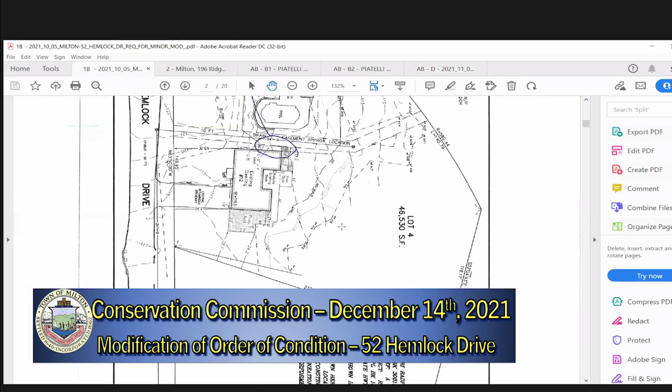First on the agenda is number one, modification of order of conditions at 52 Hemlock Drive. Is there a presenter for that? Yes, Steve, do you know anything about this? I have not heard it from anyone, but I do have some information, which I've put on the screen. If you could, just kind of walk us through it - we've got it in our packet, but you may want to address what the issue is.

This is a matter that we did issue an order of conditions - the date is November 2020. That is one where they wanted to build an addition on the opposite side of the house, so if you're facing the house from the street, it would be on the right-hand back. The one that we approved before was on the right as you're looking in from Hemlock Drive. Exactly, right here.

That's the one where we had asked for a revision because their original plan had a cantilever deck going out over the 25-foot non-disturbance zone. At our request, they pulled that back, gave a redesign, and we approved it back in 2020. So this is a proposed request for a revision. Can you describe that, Steve?

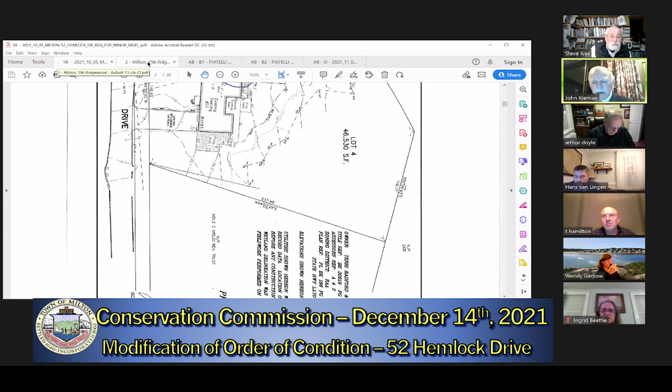In the meantime, we can defer that and go to number 2 on the agenda, which is a request for certificate of compliance from 196 Ridgewood Road. Do we have an applicant for that request? It sounds like we're in the same boat as the first request.

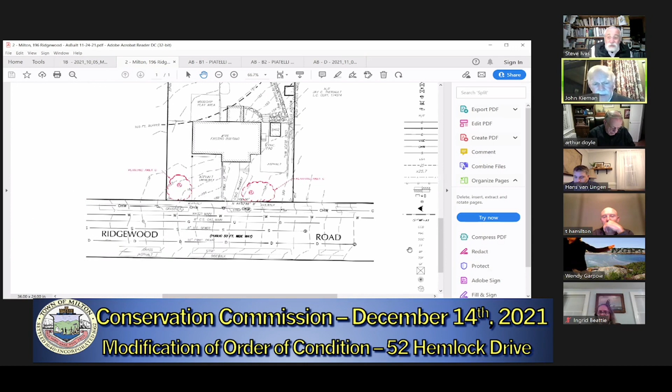Steve, do you have any information on the applicant? I know you've had some discussions. I was there about a week ago. The applicant is, let me think - I spoke to a woman named Danielle Dunn in Ridgewood on site. Do you have any understanding that they knew the application was going to be considered tonight? I don't know. For the benefit of the commission and the public, can you describe what the proposal is? This is a request for a certificate of compliance.

A couple of years ago, we approved a swimming pool installation, 20 by 40. I don't know if you can see I'm sharing the screen - can you see it? Yes, we can. Good. In any case, there was a pool house, et cetera, and a lot of plants to be put in. I think there were 25 plants required, and they placed 61.

The wetlands are in this area. Let me think - is this the 25-foot line? No, that's the wetland line. Here's the wetland line, done by Ecotech. Here, the green line and the green line. The 25-foot line is here and here on this side. The little red dots are either trees or shrubs that have been planted and are on site. They put quite a bit in. Yes, they did a nice job, and it would be good for the commission to at least see it, perhaps at some point. It wouldn't be a long stop at all.

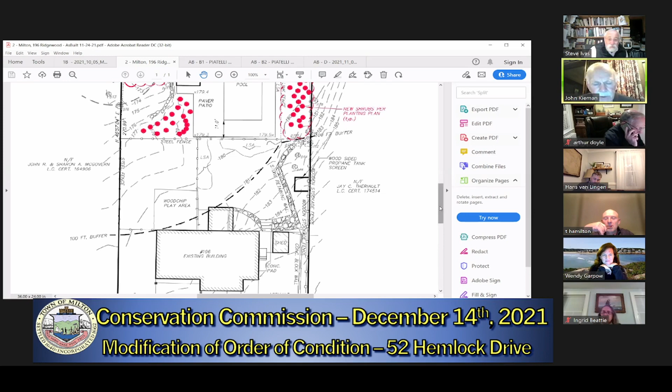With respect, this is the one where the woman who owned the residence had a permit for a childcare center. There's a paved patio area where the kids were going to play, and we were quite concerned with the fencing there to make sure the children were not exposed to an open pool. She was aware of that, and agreed to make sure the appropriate fencing was in there to protect the kids - it's part of a town bylaw anyway. And appropriate fencing and a gate as well.

I remember I lifted up a lock for this particular gate, which I thought was interesting - children couldn't get to it, it was probably 4 or 5 feet high anyway, and then you had to lift something up, so they would have had to have a 6-foot extension. It would have to be a large child to get through the gate. And there was a provision for locking, because there was a lock that she unlocked to get me through the gate as well. So I thought that was excellent.

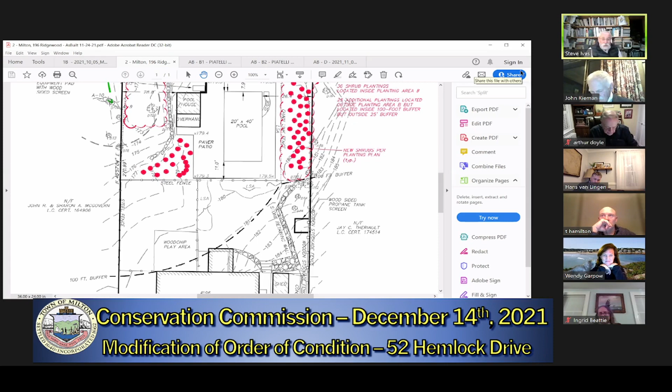All right, now I am looking at the letter from Jim Burke. Yes, and this is a request for a certificate of compliance.

In the letter dated November 24, 2021, Jim Burke says: I hereby certify that the proposed project was constructed in substantial compliance with the issued order of conditions and approved site plan on record with the Milton Conservation Commission under DEP file number 046-0550, with the following exceptions.

I want everyone to listen to the exceptions. Number 1, 9 plantings in the planting area A are located outside area A and inside the 25-foot non-disturbed buffer. Number 2, the total proposed plantings for area A is counted as 21, not the 25 as approved. Number 3, the total proposed plantings for area B is 61, exceeding the approved amount of 25.

Number 4, a temporary deer fence is added to protect the plantings from damage. Number 5, the retaining wall was slightly relocated to accommodate the existing slope and provide improved aesthetics for the pool area.

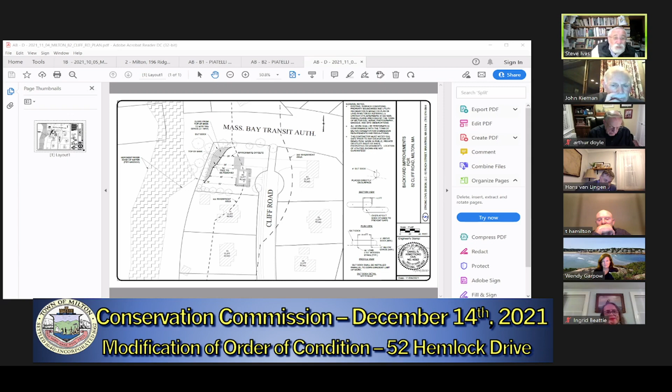Tree and shrub proposal — let's take a look at that. Go check.

There's an old plan. So it looks like the retaining wall on this one's further out.

I can't tell where that retaining wall is without your cursor. Is it in the red? I remember talking about the retaining wall being on this side of the pool, because there's a drop off there from the adjoining property. I thought that's where it was going. Is it under that cloud? Area B is the cloud for the plantings.

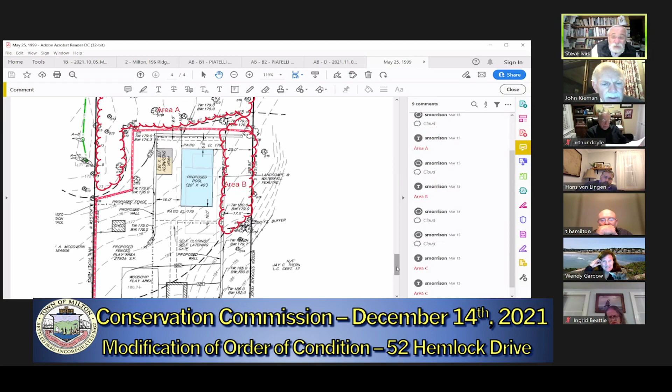There's nothing there. This is a planting plan sketch. So I did not see a retaining wall on this side, I just saw a slope. Right, that's what I saw on that side.

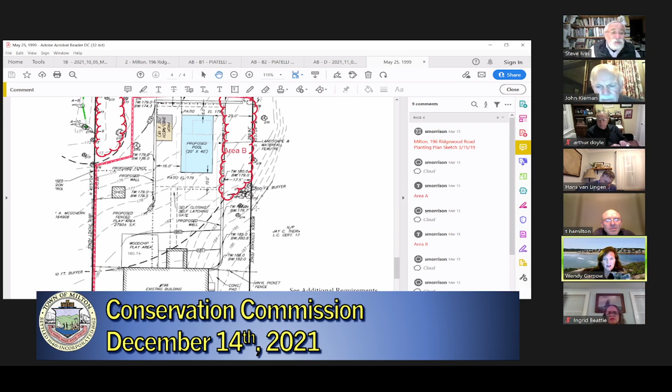Wendy, did you get out there to take a look at it? No, I didn't, but I don't see a retaining wall on this plan, though I did see it on the one presented earlier. Really? Yes, a pretty significant one. Where is it? Underneath cloud B, close to the house, at least I thought that's what I saw.

The only one I see is the one that says retain. Go back down a little bit, Steve. Next to the pool house is a stone retaining wall, that's all I see. This is sort of a stone retaining wall here. Oh wait, there's another one here, but I don't think we were talking about that one literally adjacent. That's outside the buffer zone anyway, Steve.

That's exactly correct. We were talking, Todd, when we first looked at this a couple of years ago, there was a proposed retaining wall right in this area under planting area B, I think it is. They might have been able to grade it without it - that's what it looked like to me when I went to the site. What does that do to the grading in the back? Why is there a retaining wall in the back? That's a small stone retaining wall here.

That's one stone, I think. Doesn't it go all the way around the corner? No, it goes around this one, stops right at the middle, John. Stops right here, yeah. Now go the other way - to the left, no, the other way, down to, yeah, right, it goes here.

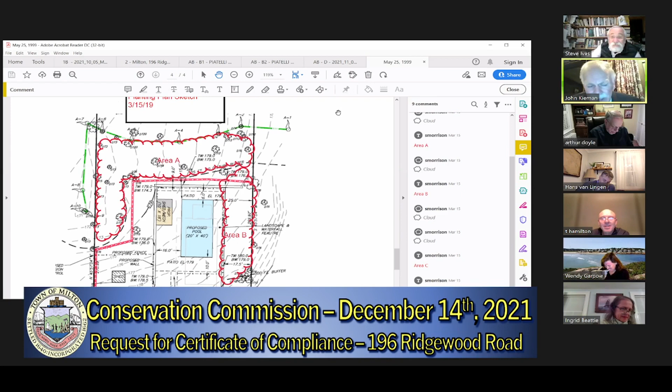All right, why don't we do a site walk? I will not be present, but you will have a quorum. I think that's really the only issue, because there's a net increase in plantings, although they rearranged it, but that's something you can take a look at. It's probably not a significant revision.

But let me ask you a question, John. We got to get a hold of the homeowner because they're not here tonight, so we just can't show up there, right? We should, right. You are correct on that, Todd. I don't want to walk back there without someone saying it's okay. It's hunting season, Todd.

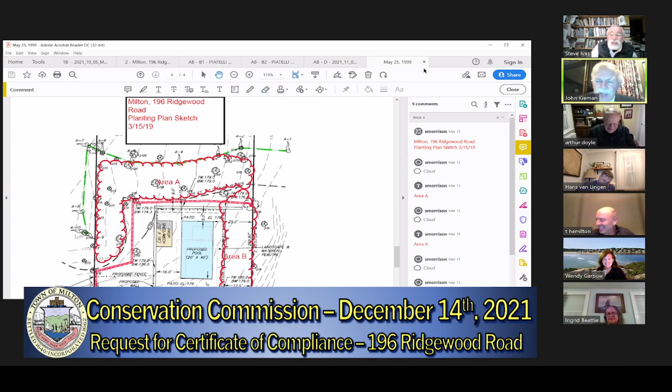Sure, I mean that would be up to the homeowner. I don't want to create a cost for them. Yeah, no, I got you. Okay, I will see if I can make that happen. All right, good, and I will confirm, all right?

The only thing we need to make sure is that's published tomorrow. Right, exactly. All right, fair enough. So this matter will be continued to a site walk, which will be a public meeting on Saturday morning. The location is 196 Ridgewood Road, and the meeting will take place at 8 a.m. So those are the only 2 active items.

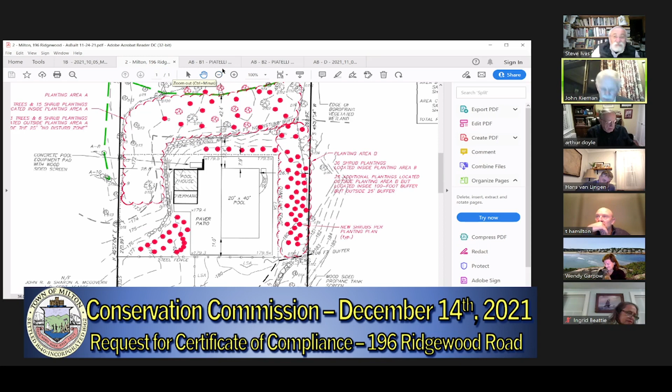Arthur, were you able to make any connection with 52 Hemlock Drive? I tried, but was not successful. Well, I think the pictures, I don't think we need a site walk there, but I think we do need an applicant. I agree. So if you could, Steve, ask Lynn to reach out to them, or if you have time, reach out to them and put them on the agenda for next January. Be happy to. All right, thank you.

That would be the 11th of January, by the way, folks. Okay, put it on your calendar, please. Excuse me, 2022. Chairman? Yes, sir. Wouldn't it be possible just to swing by and do that one on site? But we don't have the applicant. If the applicant can be there on Saturday morning, sure, give them that option.

And so for publication purposes, you could put that on the agenda. I know people want to do it early and fast, but I don't think either one of these are going to take very long. I'm just concerned that the applicant participate in the process. So if that's acceptable to everybody, I don't think it'll add much time. But if you could go there second, that makes sense.

But that would require that we make contact, Arthur. But again, Steve, if you would, I will take care of that, follow through on it. I'm sure I have his phone number because I've spoken with him before. Perfect, all right. So I will be happy to do that, and if they can't make it, then so be it. Okay, and you'll get an agenda on Thursday afternoon, most likely. Okay, perfect, good, all right.

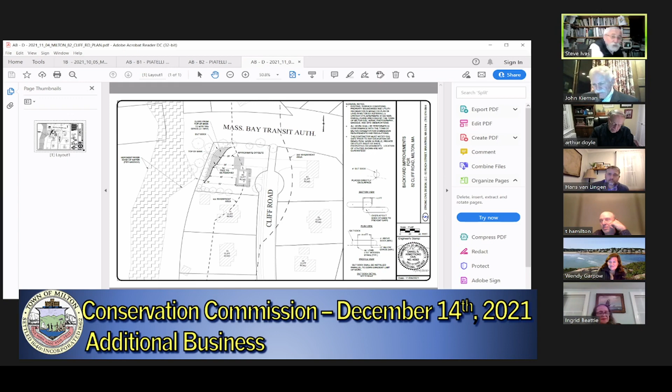So I decided, since there's not a lot of wetland vegetation in it, it's not jurisdictional wetland. So I told them to go ahead and do the work. However, this field here, what Hans called Lower Guile Field, also has potential for being drained, and there are already some flags out, wetland flags along the field.

We talked about the wetland flag locations, which looked very good to me. They were done by Epsilon Company, Mike Howard, a similar gentleman to our friend Art Allen, who's a serious professional, I'd call him. Eventually we'll have a proposal to do some work in this field. I think they're going to have to do some cutting of this bank here because they don't have the 25-foot buffer.

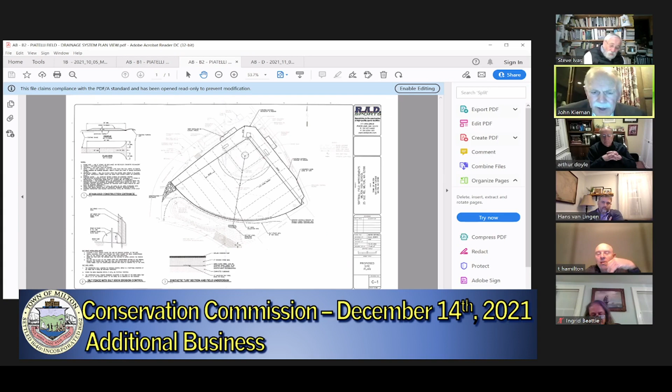Could you reach back now? Are you dealing with Chase on this, or who are you dealing with, Steve? Chase, yes. Can you back up to the other plan that shows both the upper field and the lower field? Yeah, that one. Did he give you any indication - are they currently working on that upper field? Oh yeah, they're ready to go, they're gonna start very soon once the snow goes away. So they're just piping it out into that swale.

Yes, into this feature here, which was built after 1996 and before 2008, so it doesn't qualify as a wetland resource. Was it constructed as a stormwater feature or a drainage feature? They're one and the same, aren't they?

It depends on what the intended function is, isn't it? Well, if it's drain, it's drain. It's draining there, and then it hits a pipe and goes right down under the road. Under the road, yeah. And there's a large pipe right there by the bridge.

That's what Chase told me the other day. And in fact, he's got some old plans that he thinks show it. So it may be producing more water, but it's directing all that water via the pipe to the brook, past the lower Guile Field.